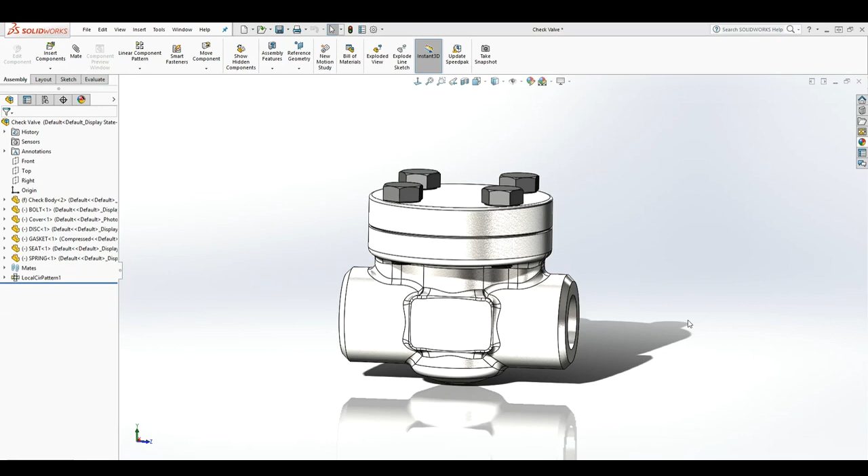In this lesson, we are going to be learning how to do a rotation animation using a sketch. So the first one we did is just a basic rotation, but in this one, we are actually going to be using a sketch to do our rotation animation. And using a sketch is actually the best way to do your rotation animation because it allows you to control your rotation very well.

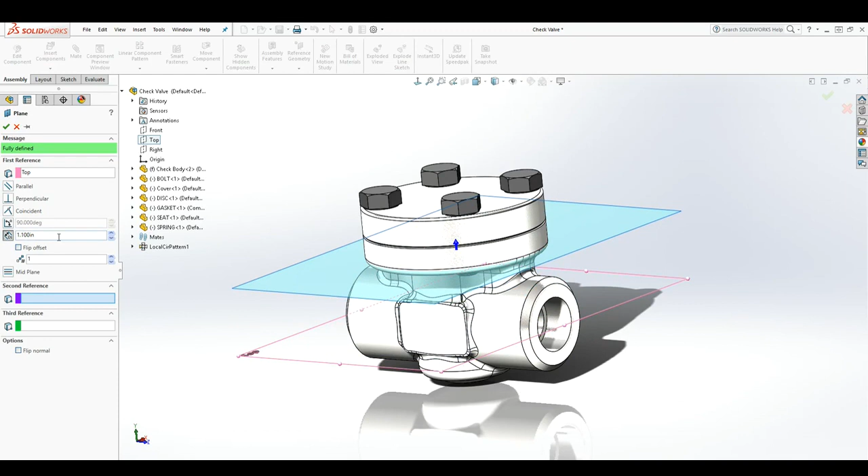So to show you what I mean, let's click on the top plane, and first of all we need to draw our sketch. So looking at this model, I want to raise this top plane up a little bit. So let's click on reference geometry, and let's just raise this top plane up to something like that. 1.1 is good. So we'll click OK. So on that new plane, plane 1, let's draw a sketch.

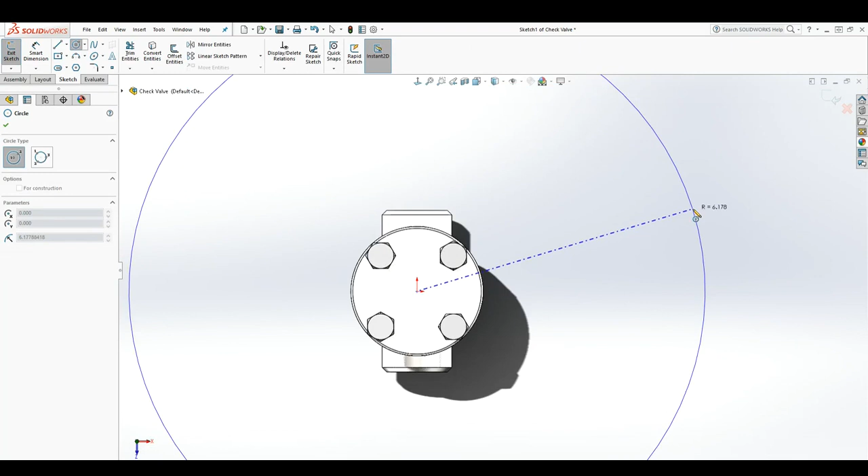And so now let's go normal to, and let's just draw a circle. So I'm gonna zoom out, something like that. A circle that is big enough. So what we want to do is let's draw two lines connecting to that circle, and let's dimension that circle. Let's make it 13. And now let's trim this edge away.

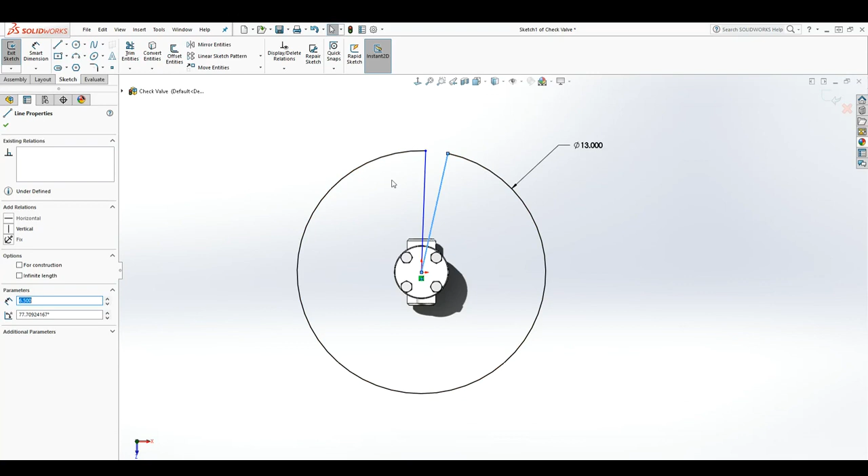And trimming this edge is very important because when you rotate your camera around this circle, SolidWorks is going to be able to tell whether you are rotating in clockwise direction or counterclockwise direction. If you don't trim it, SolidWorks won't be able to tell in what direction you are rotating. So we're just going to make these two lines construction lines, or we can even delete those two lines. We really don't need them. We just need them to trim our circle. So now exit that sketch.

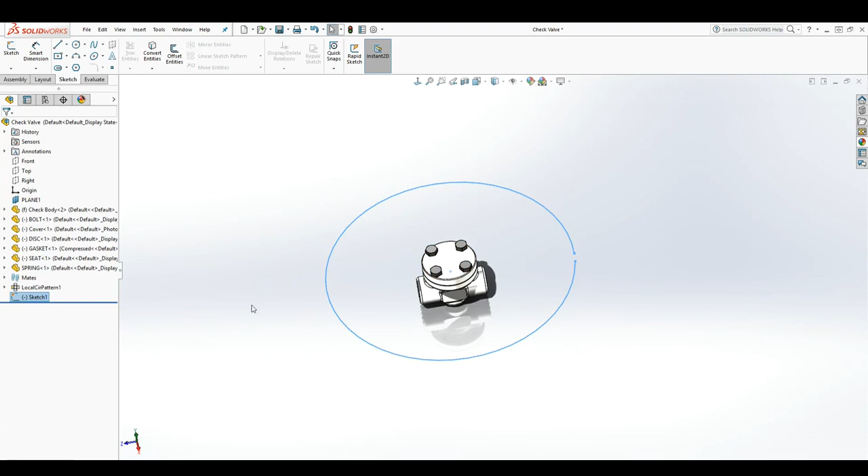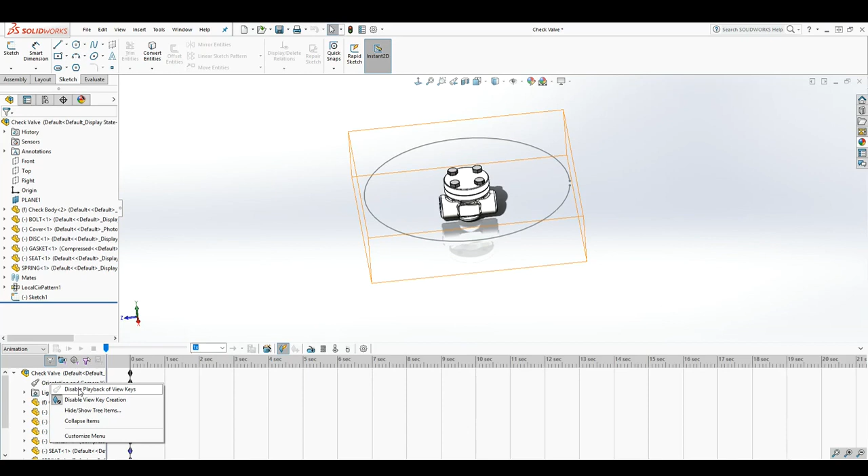Now let's go into our motion study tab, and if you are continuing from the previous one, you can right click on that model and create a new motion study. It's still gonna be the same thing. So the next thing we need to do now is right up here, right click and click disable playback of view keys again. Then under lights, cameras, and scene, we want to right click on this and click add camera.

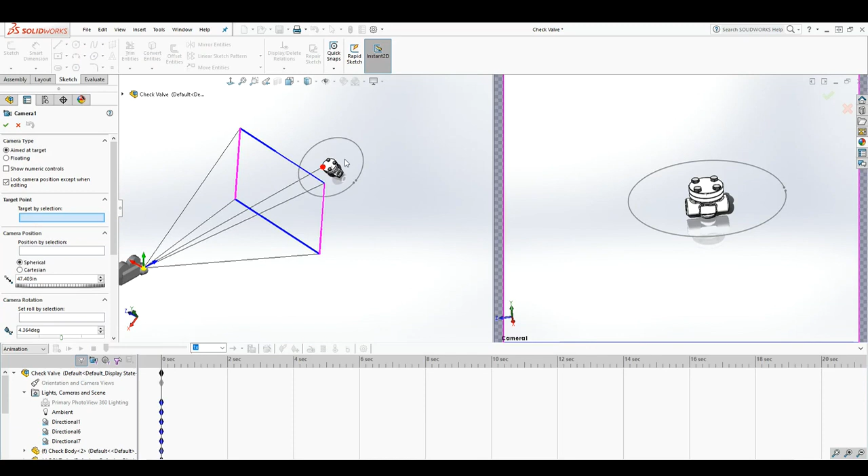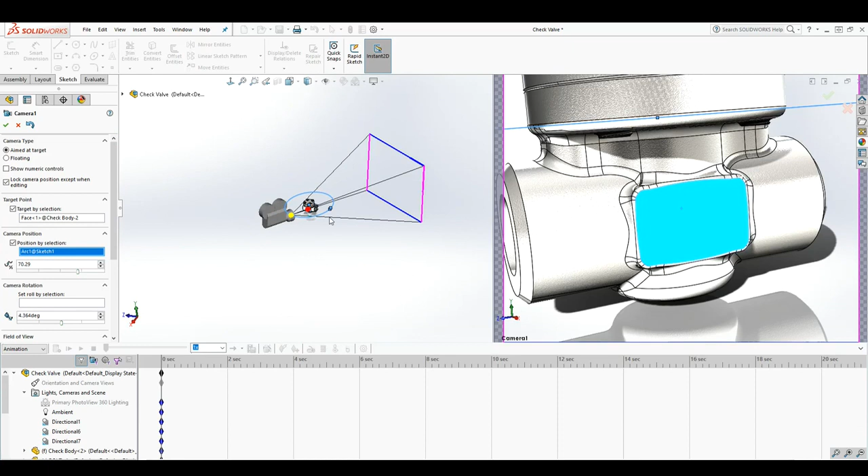So now we are in the properties. The first one is the target. Target is where you want to be targeting, and you have these two screens. This screen is where you're going to be editing it, and the right screen is what it will look like. So for our target, we want to click somewhere on that body and position the camera. Now we want to place that camera position on the sketch we drew. So the next thing we need to do is just zoom out.

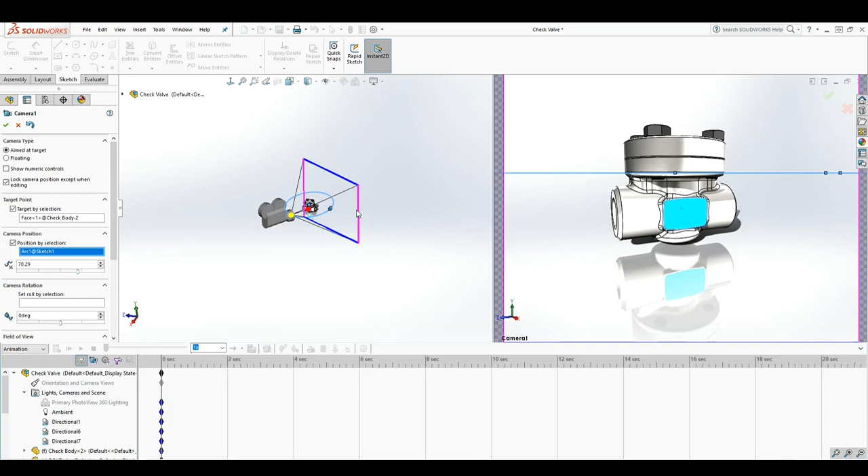So that's what it looks like. Make sure this is 0 degrees. So as you can see now, it looks normal. So 0 degrees, and that's all you need to do, and you can zoom this out. So remember, you select the face, click where you want to target. I can pretty much click anywhere on this valve, it doesn't really matter. And for where to place your camera, you click on your sketch and click OK.

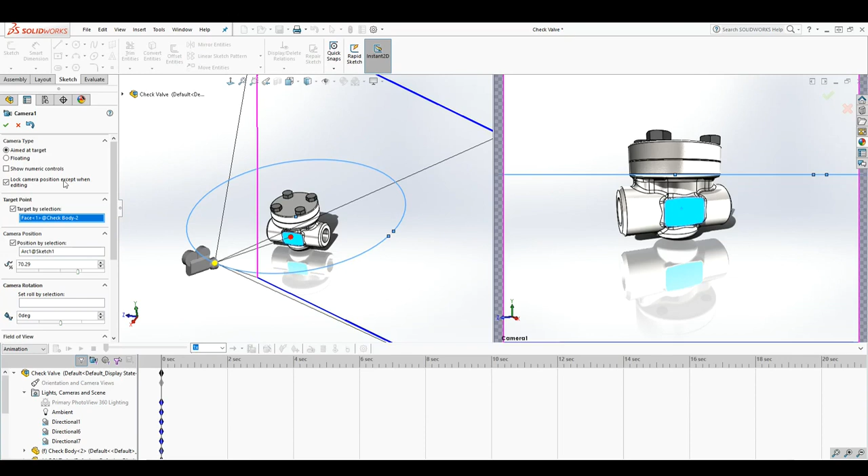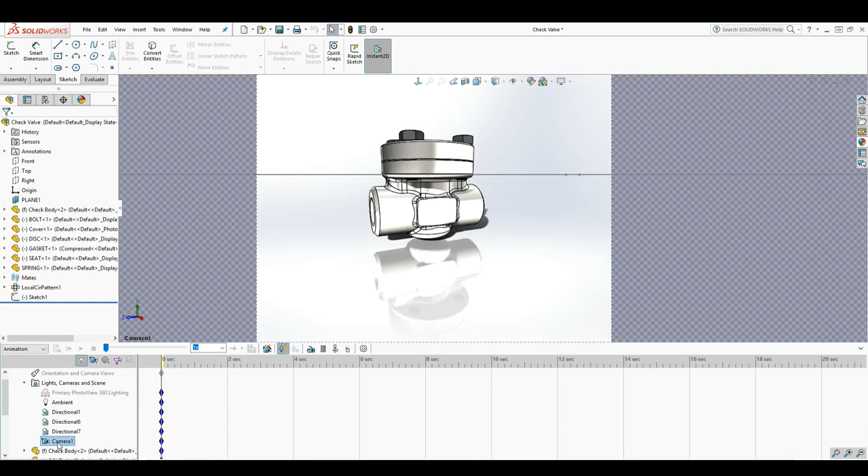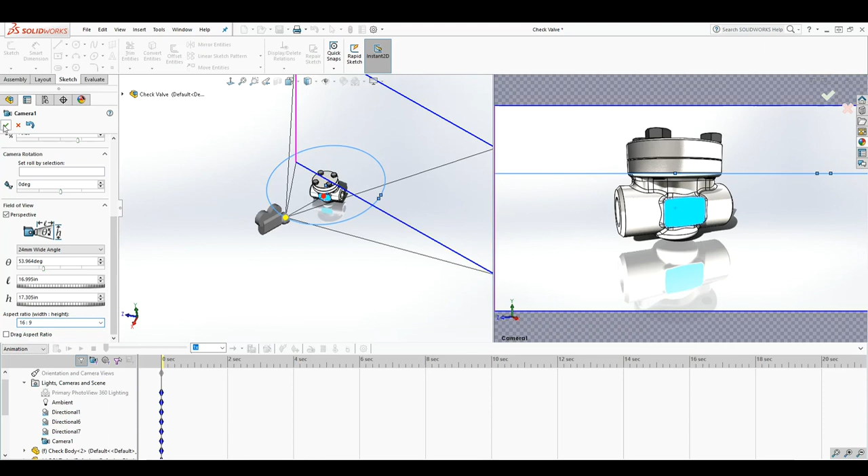And I actually don't like my sketch; I need to make that sketch bigger. So let's change it to 25 to make that part bigger. So when I go back and I click on that camera, properties, I'm going to edit it, and I can zoom in. So I have something like that. That looks good. And the next thing we need to do is just come down and change this to 16 by 9 and click OK.

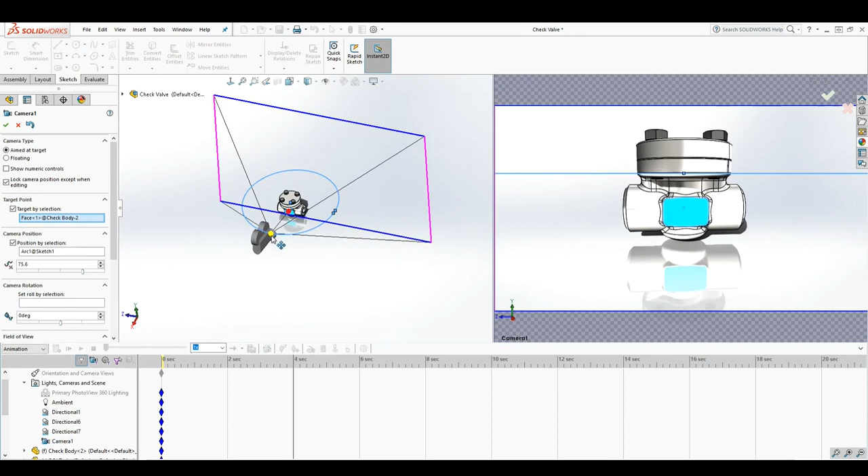So now I'm in my animation. So what we need to do is drag this timeline to wherever we want it. Let's say we want to drag it to 5 seconds, or I can drag it to 4 seconds. Then I would right click on that camera again, go back to the properties, and I can now move this camera, just swing it on that path. While it's still on that path, swing it somewhere right here and click OK. Now as you can see, SolidWorks has created a new keyframe for that position of that valve.

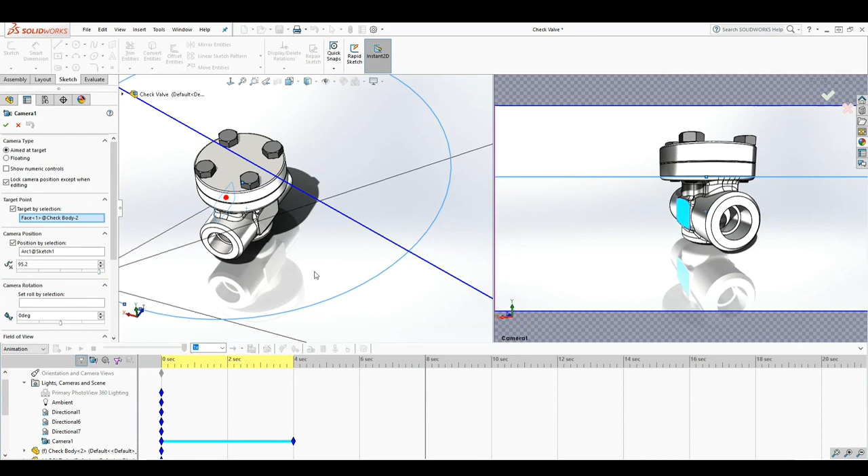And the next thing I can do is drag it to 8 seconds again, right click on the camera, properties, and let's rotate it back this way to something like right there, and we click OK. So now SolidWorks has created another keyframe. So if I press play, as you can see, my camera is rotating to the first view, and it rotated back to the second view. So that is how you do your camera rotation in SolidWorks.

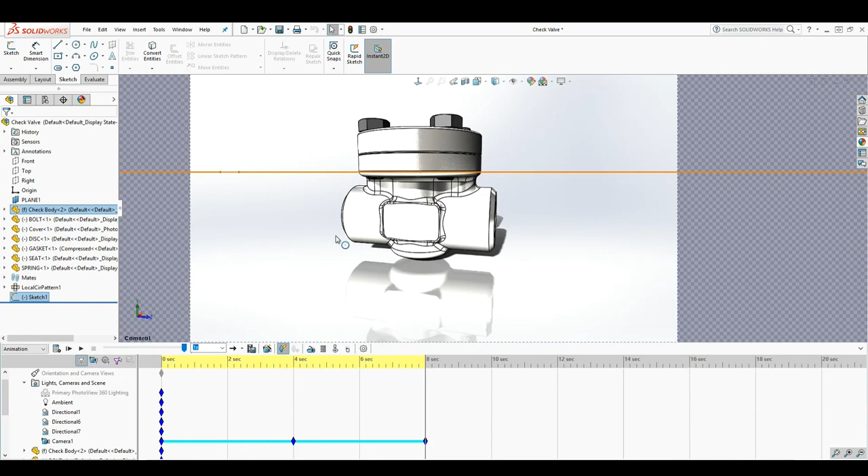Remember, you would make your sketch where you want to put your camera, go into your properties, and the target is where you want to be always pointing at, and your camera position will be on that sketch you drew. Then you can rotate your camera around it.

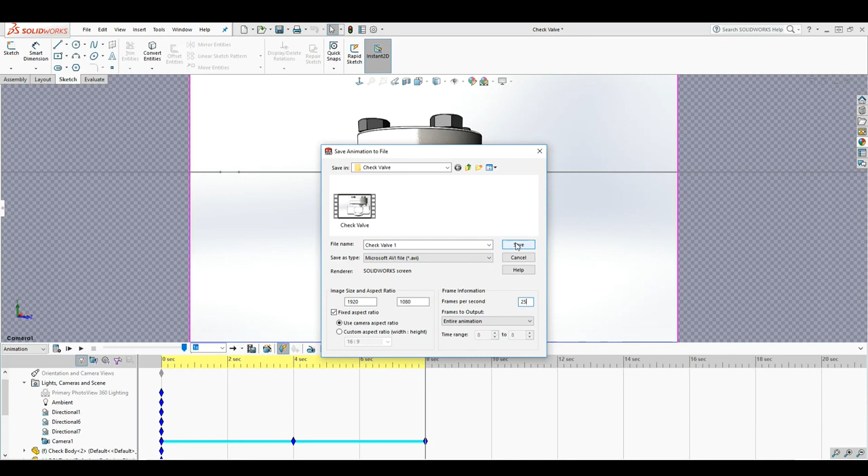And to save it is the same way. We'll just click save, browse to the location. I'll call this 1, and 16 by 9, and let's just make this 25. And we click OK, and we'll click full frames uncompressed and click OK. Do you want to recalculate? Yes. And now our animation is saving. Just give it a couple of seconds. Depending on how big your animation is, it will take some time for your animation to save.

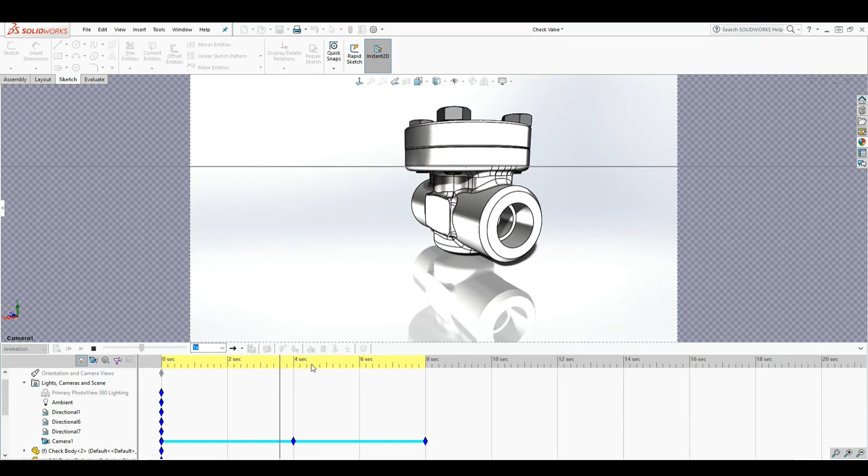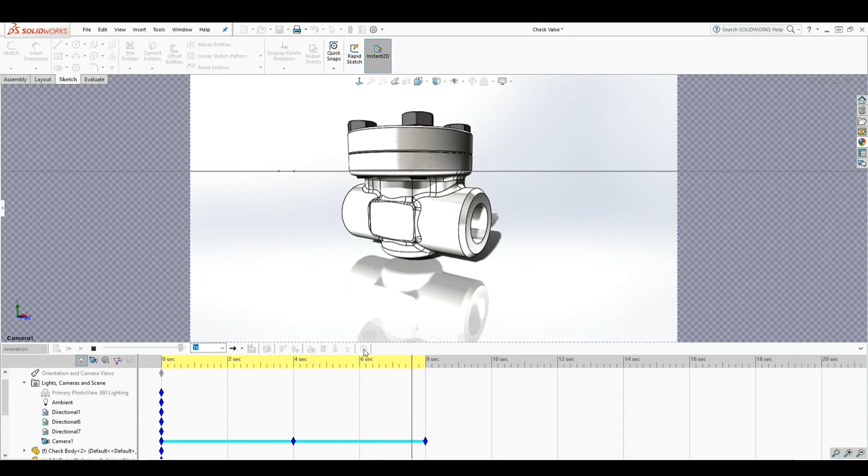And just bear in mind, if you are using PhotoView 360 in SolidWorks, it would take even longer. If you want to save it as PhotoView 360, that option will be under the option where we select the AVI file. Then you can select PhotoView 360. So it's done. Let's browse to our file location, and we have the valve 1. And when I click play, as you can see, there goes our animation that we just made.